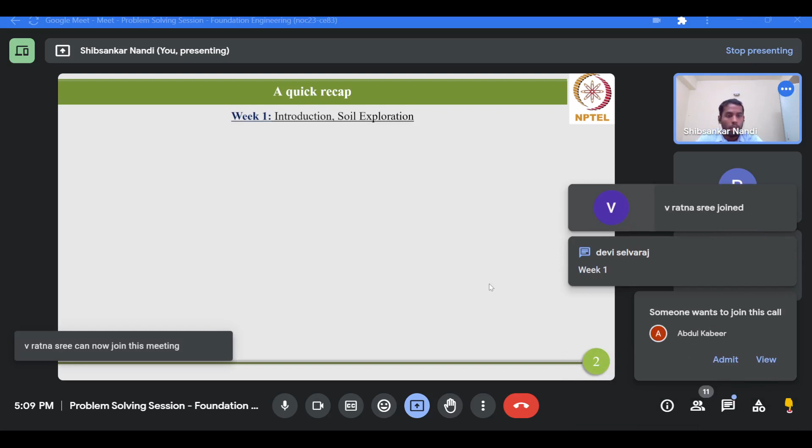I hope that you all might have gone through the weekly lectures. So far I think 5 lectures are released on the NPTEL portal. So have you gone through that? Sir, I am yet to go through. Okay, got registered, okay, that's fine, not a problem. Then I'll first briefly explain the topics as per my understanding, which I have learned from this specific week.

First of all, we have brushed up the concepts or basic fundamentals of soil mechanics. So what are those? Grain size distribution, weight volume relationship, relative density, Atterberg limits, hydraulic conductivity of soil, effective stress, compaction, consolidation, and shear strength. These are some basics of soil mechanics. Without the concept of these topics, we cannot proceed further.

This is an advanced level course, foundation engineering. So to solve the problems of this specific course, we need a very clear and in-depth understanding of these topics. We'll discuss more details about these topics while solving a few problems during today's session.

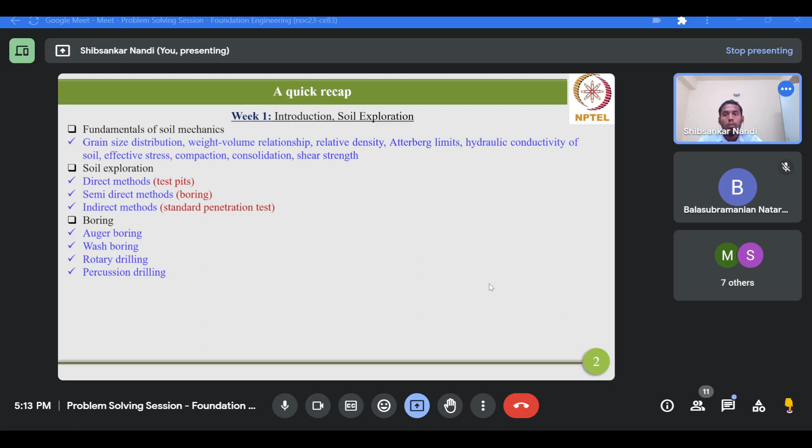Yeah, I think someone raised a hand. Ask what problem you were facing. What exactly are you trying to ask? Someone has raised a hand, feel free to ask, either use the chat box or unmute yourself. Sorry, I am not getting a response from your end. Okay, if it's fine from your end, then I can go further.

So boring can be classified into four groups, as mentioned earlier: auger boring, wash boring, rotary drilling, and percussion drilling. I assume all of you know the basic procedure by which boring is done, and for a particular boring method there are some limitations. It is not suitable for any kind of soil or any kind of engineering application, specifically in the context of geotechnical engineering. That you should know very clearly.

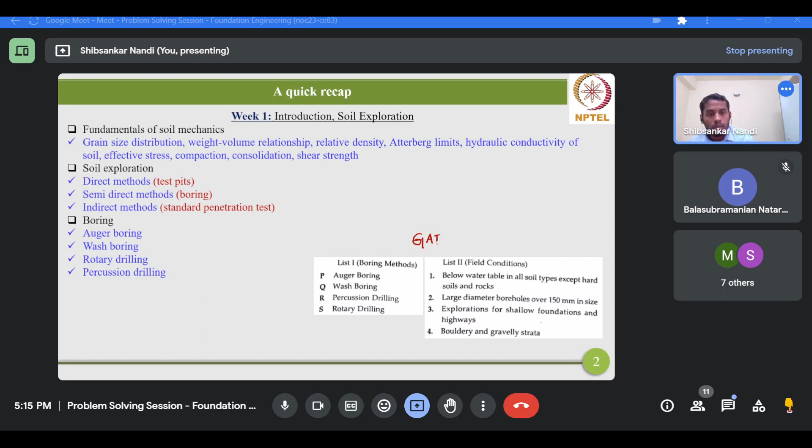For an example, I'll take a reference from GATE 2003. This data is taken from GATE. As you can see, there are two lists. The first is list 1 and the second is list 2. List 1 shows the boring methods like auger boring, wash boring, percussion drilling, and rotary drilling. List 2 shows the field conditions.

Now what we have to do is match the entities of list 1 with the entities of list 2, so that the boring method listed in list 1 is suitable for the field condition listed in list 2. This question is from GATE 2003. To solve similar questions, you should have knowledge of each boring method, its standard procedure, and its suitability for a particular type of soil or specific engineering application.

So can you please answer this question? Auger boring is for shallow foundation and highways. Yes, that matches with entity 3 in list 2. Very good. Auger boring is basically suitable for exploration for shallow foundations and highways.

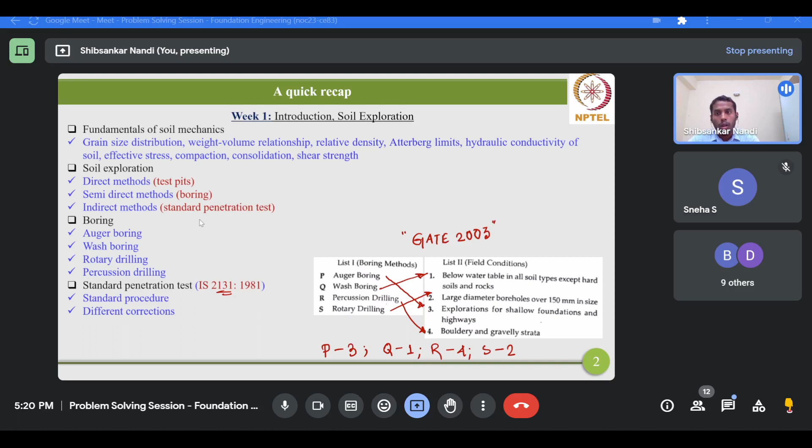So in this session we'll mostly solve a few numerical problems regarding the fundamentals of soil mechanics. Since we have learned very little about foundation engineering, except boring, different methods for soil exploration, and standard penetration test, we'll confine ourselves this week to solve a few numerical problems from the fundamentals of soil mechanics. Still, at the end of the session we'll try to solve two problems concerning the standard penetration test. Okay, let's start this session.

So problem one is related to the weight volume relationship. A sample of clay has the liquid limit and shrinkage limit of respectively 60% and 25%. If the sample has a volume of 10 ml at the liquid limit and a volume of 6.4 ml at the shrinkage limit, determine the specific gravity of the solids. Now we have to determine the specific gravity of the solids with the data given, like the volume of the soil sample corresponding to liquid limit and shrinkage limit respectively, where liquid limit and shrinkage limit values are 60% and 25% for the given soil sample.

So how can we solve this problem? Any idea? Okay, first let me ask: what is the definition of specific gravity of solids? If we denote the specific gravity of solids as Gs, what is the analytical expression for this Gs?

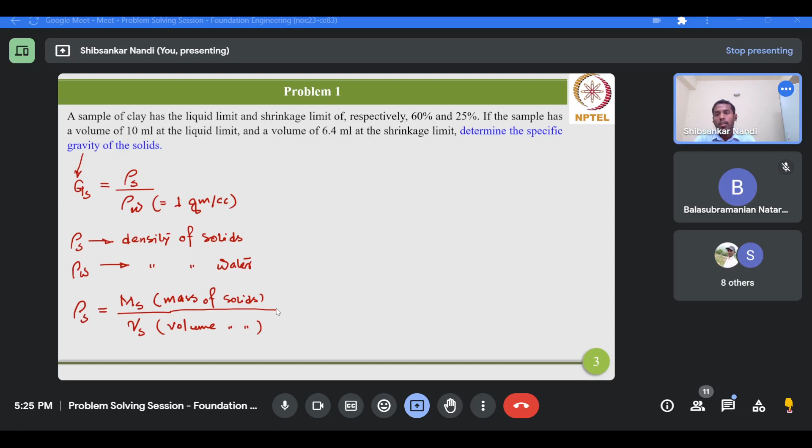So it is the ratio of mass of solids divided by volume of solids. So therefore we need to know the mass of the solids, which is basically involved in this given soil sample, and the corresponding volume of the solids. So if we know these, we can easily determine the specific gravity of the solids for this given soil sample. So for that, I am giving you some hint.

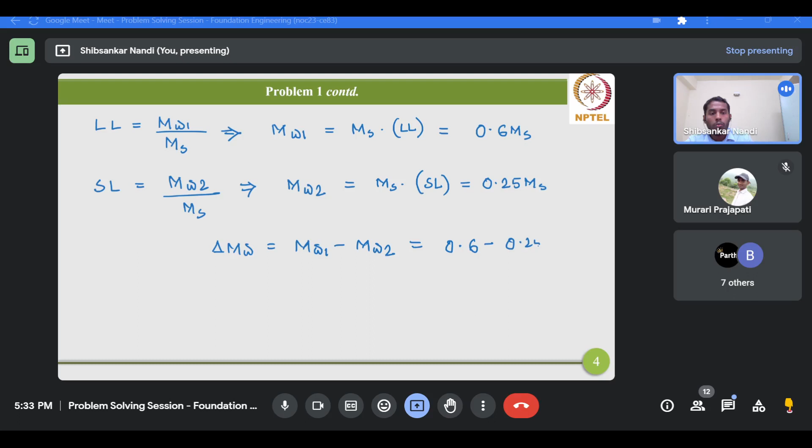Then delta MW would be MW1 minus MW2, that means 0.6 minus 0.25 times MS, that means 0.35 MS.

So we have determined this delta MW in two different ways. First, from the change in total volume of the sample: 10 minus 6.4, multiplied by the density of water - this gives the volume of water change, then multiplied by density gives the mass. Secondly, we determined it from the definition of water content.

Now these two should be equal - delta MW of 3.6 grams and delta MW of 0.35 MS. So 0.35 MS should be equal to 3.6 grams. From here we can easily determine the mass of solids as 3.6 divided by 0.35, that means 10.29.

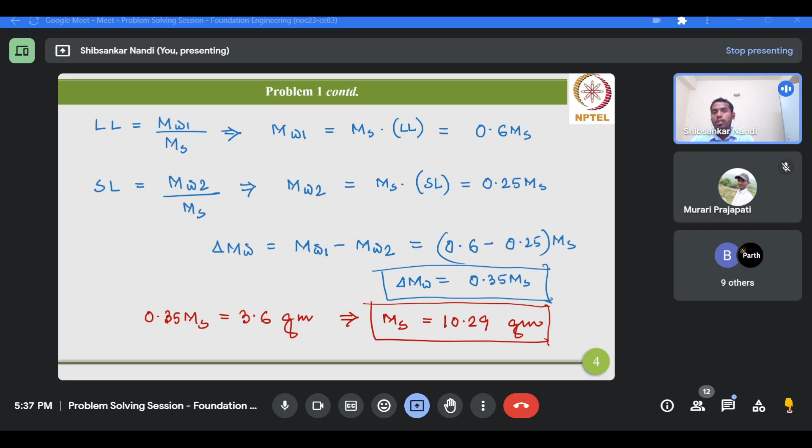How can we determine the volume of water? Because we know the mass of water for both conditions, liquid limit and shrinkage limit, from this expression: 0.6 times ms and 0.25 times ms respectively. Now we'll consider the liquid limit condition.

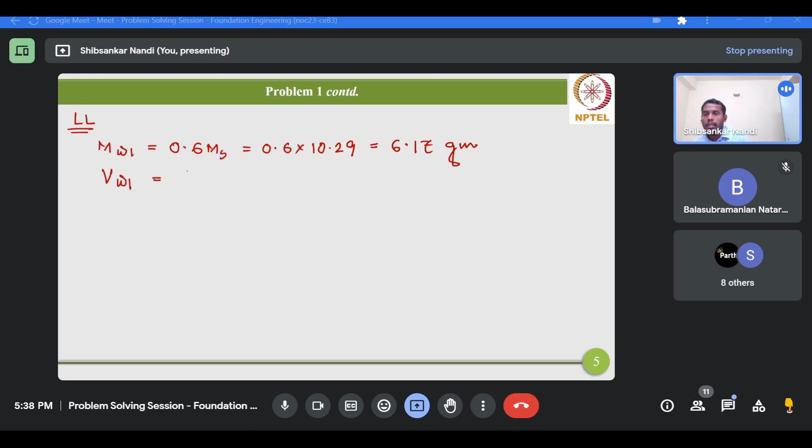So MW1 is 0.6 times ms, that means 0.6 multiplied by 10.29. What would be the value? It would be 6.17 grams. Since we know the mass of water, we can determine the volume of water by dividing by density: 6.17 divided by 1, that means 6.17 milliliters.

So the volume of solid would simply be V1 minus VW1. V1 is the total volume, so 10 minus 6.17, which gives 3.83 milliliters. Now it becomes very easy to calculate the density of solids, ms by vs.

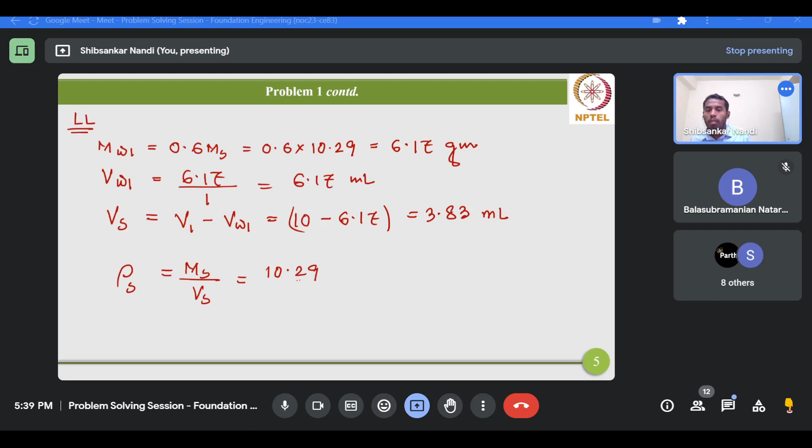So rho s equals ms by vs. ms we have got 10.29 and vs we have got 3.83. 10.29 divided by 3.83 gives 2.68, or 2.69 rounding up. Very good.

So GS, we can determine 2.69 divided by 1. So this would be the answer.

So this is the way by which we can determine the specific gravity of the given soil sample for the prescribed conditions. What are those conditions? The volume of the given soil sample concerning water content, which are liquid limit and shrinkage limit. By employing the basic three-phase relationship, we can easily address this kind of problem.

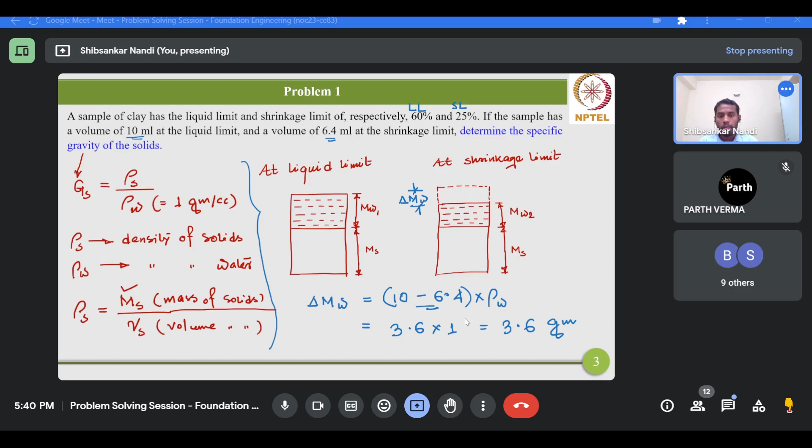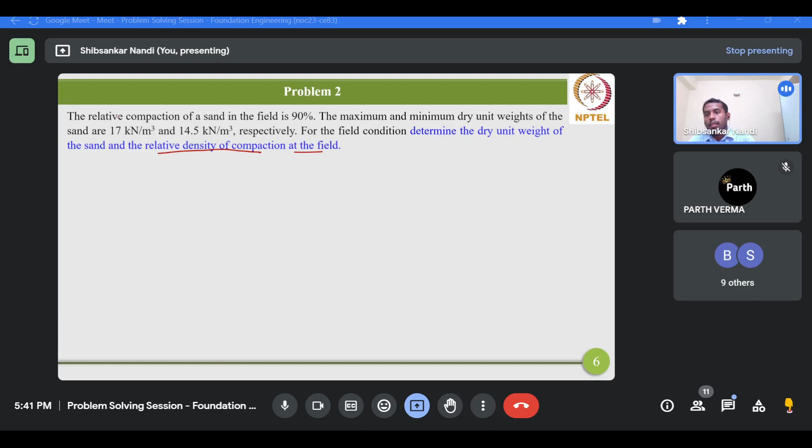As we can see from the problem statement, two terminologies are utilized here: the first is relative compaction and the second is relative density of compaction, or relative density. Now can you clarify for me, are these two terms the same? Do they signify the same physical entity, the same physical condition?

Yes, sir. How? Explain a little bit please. Sir, both tell about the denseness of sand, soil. You can go one by one. Okay, so first, define the term relative compaction. What is relative compaction?

What is relative compaction? What is compaction? It expels the air. Yes, so compaction is basically the process of densification of a soil through the expulsion of air. Okay, you are very correct.

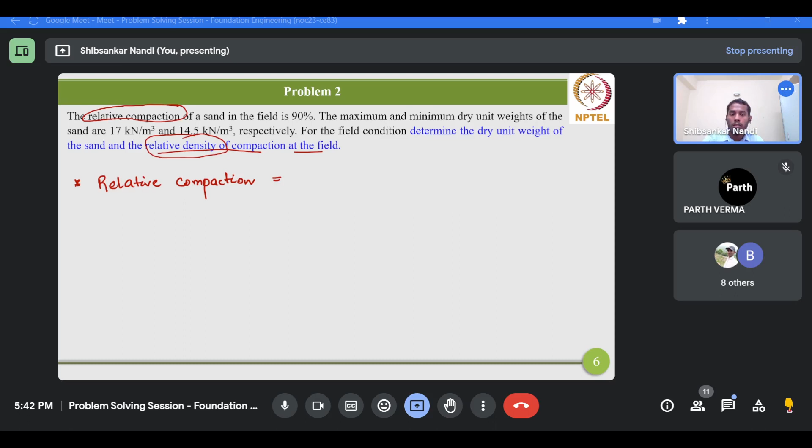Now then, what is relative compaction? It is nothing but the ratio of the dry unit weight achieved in the field divided by the maximum unit weight or density, whatever may be the case, obtained in the laboratory. So this is the ratio of field dry unit weight to the maximum dry unit weight. Is it correct?

Is it correct? Not getting that. Then what is the definition? Sir, not getting. Okay, you are not getting. Okay, so...

This is basically, suppose when you will be constructing some highways, dam or earthen embankment, so before that you need to compact the field. Yes or no? You need to compact, no?

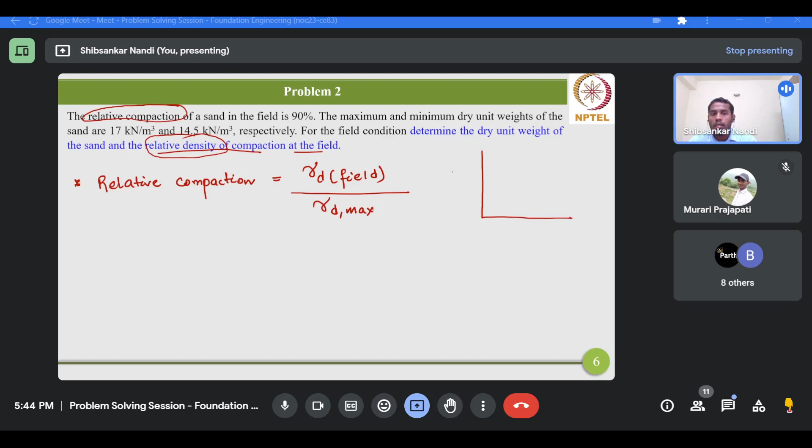So this kind of plot, this is the density and this is the water content. If you add water to the soil sample, it will go on increasing, but after some time, optimum moisture content - this water content is called optimum moisture content. So after attaining the maximum dry density or dry unit weight at the optimum moisture content, if we add further water to the sample, then the density or unit weight will go on decreasing.

Okay, so now from the laboratory you will be getting some maximum density for a particular moisture content. Now if you try to simulate the same condition in the field, will you be getting the same result? Whatever you are achieving in the laboratory, if you try to simulate the same condition in the field, will you be expecting the same result or not?

No sir, so you will never get the same result. Okay, so you will be basically ending up with different unit weight or density at the field. So that means there will be a difference, and this ratio - whatever you are getting or achieving in the field compared to what you have obtained from the laboratory investigation - that ratio will basically give you an idea of relative compaction.

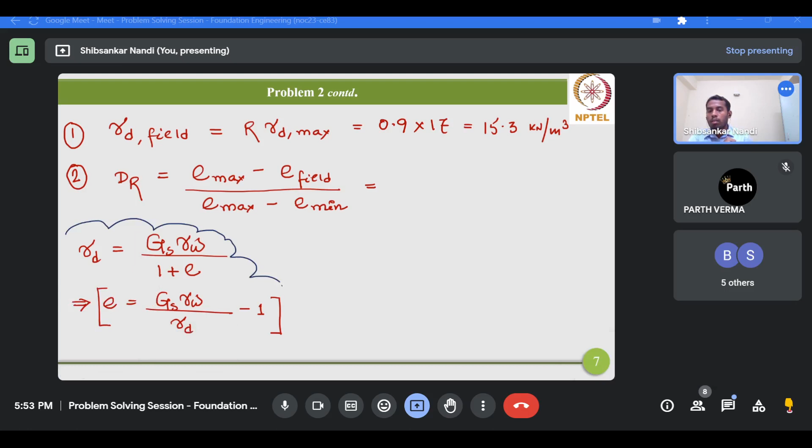So therefore, we can get the void ratio as Gs gamma W by gamma D minus 1. Do you agree with me? Yes, sir. Okay, so now we'll substitute this expression for void ratio into the relative density expression.

So E max, when will we be getting the maximum void ratio, for the maximum density or the minimum density? Now you have to be very careful when substituting this expression. The maximum void ratio, what condition will it correspond to, loosest or densest? Loosest, so that means the density will be minimum. So therefore, Gs gamma W by gamma D minimum minus 1.

And then again, Gs gamma W by gamma D field minus 1, plus 1. So minus 1 and plus 1 will cancel out, that's why I am not writing that component here. I am basically jumping one step, and then Gs gamma W by gamma D min minus Gs gamma W by gamma D max.

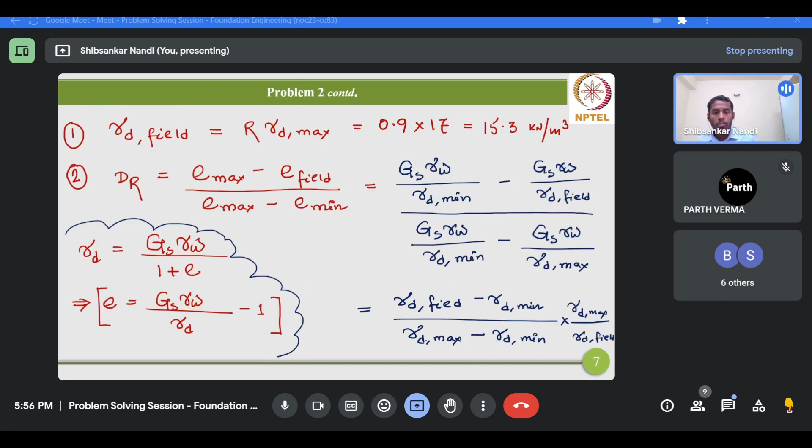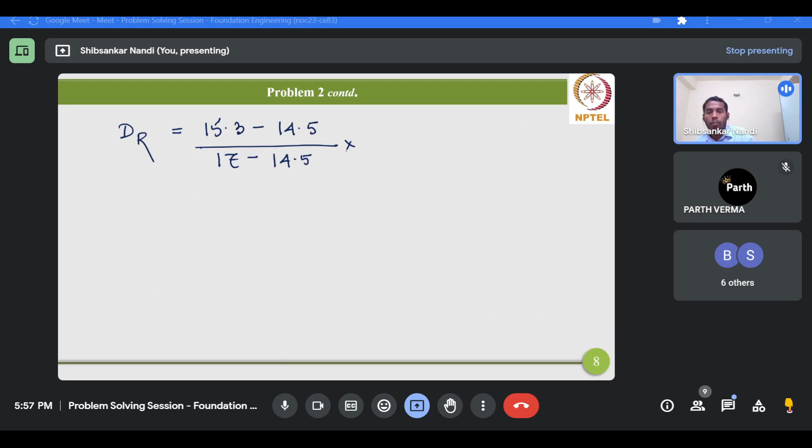Gamma D field we have already calculated as 15.3 kilonewton per meter cube. Gamma D min and gamma D max are directly given to us as 14.5 and 17 kilonewton per meter cube respectively. So the job now is to substitute the values in this expression. Dr, it would be gamma D field, that is 15.3, minus gamma D min, that is 14.5, divided by gamma D max, that is 17, minus gamma D min, that is 14.5, multiplied by gamma D max, that is 17, divided by gamma D field.

So can you please tell me the end result? 0.355. So that means 36%.

So now what does it indicate? 36% relative density. So the soil belongs to which kind of state: very loose, loose, medium dense, dense, or very dense? Medium.

Now if you know the range, if I can recall exactly: less than 15%, then 15 to 35, then 35 to 65, 65 to 85, and more than 85. So this is for very loose, loose, medium dense, dense, and very dense. Okay, so you are correct. So though it is on the borderline, meaning 15 to 35 and 35 to 65, so very close to the borderline.

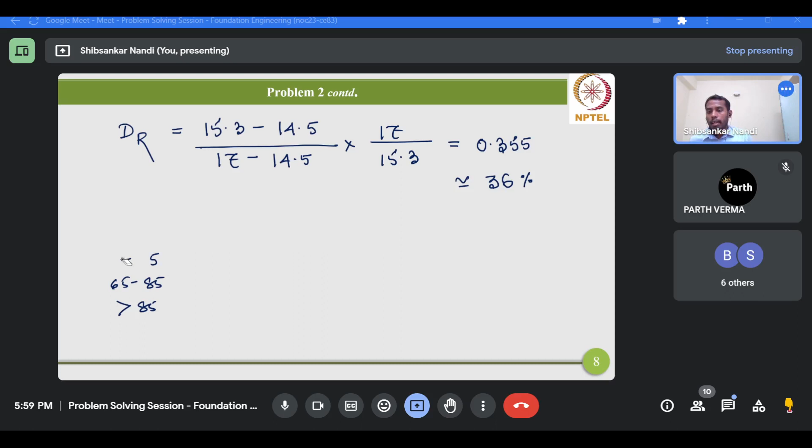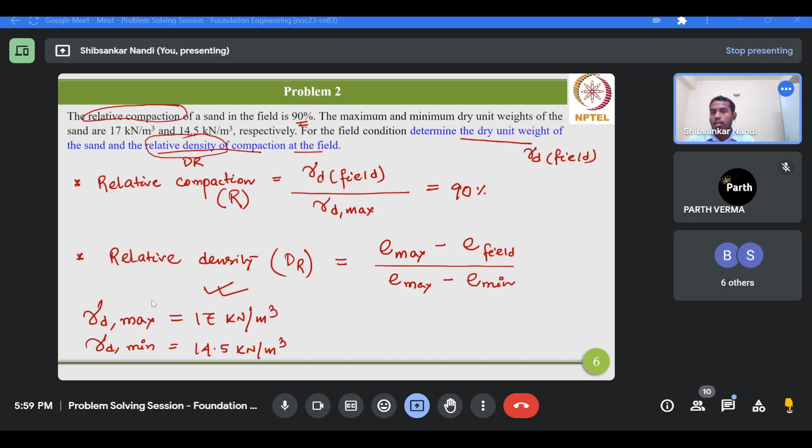Okay, so in this way you can understand the difference between these two terminologies, that is relative compaction and relative density. And it's very clear that both these terminologies are not the same. These two do not indicate the same physical condition or physical entity. Is it okay? Yes. Okay.

Now we'll take problem 3. So problem 3 is about the calculation of effective stress. Okay, so first we'll read the problem statement. The water table is at a depth of 5 meters in a silty soil mass of thickness 10 meters. Laboratory sieve analysis indicates an effective size of the soil mass as 0.015 millimeter.

If the void ratio of the soil mass is 0.67 and the specific gravity of soil solids is 2.67, and if the silty soil mass as described above is underlain by a clay layer of thickness 8 meters, what would be the effective stress at the middle of the clay layer? Assume the silty soil mass to be fully saturated in the capillary fringe zone, and above this zone saturated to a degree of 66%. Properties of the clay layer are given as water content 25%, specific gravity of soil solids 2.62, unit weight of water 10 kilonewton per meter cube. In addition to that, one constant is given as 45 mm square.

So first I will try to visualize the problem, the stratified soil deposit, the in situ soil deposit. So first of all, there is a silty soil mass of thickness 10 meters.

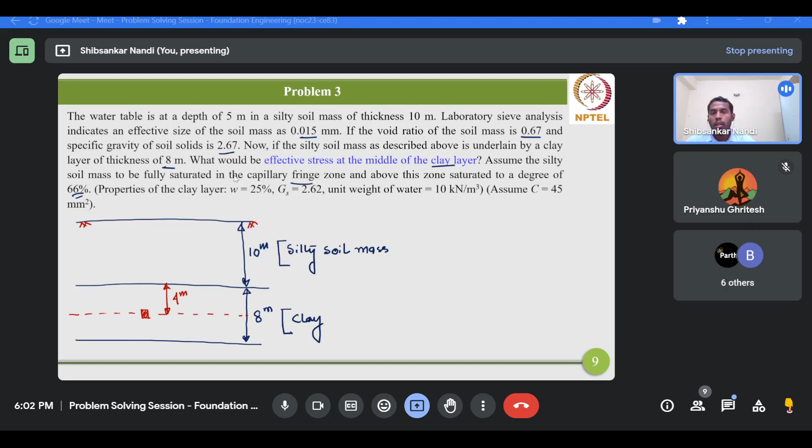Now, what is the location of the water table? It's 5 meters. So this is the groundwater table, at a depth of 5 meters from the ground surface, and this is the ground surface.

So this kind of stratified deposit we have. First 10 meters is silty soil mass, inside which we have encountered the groundwater table at a depth of 5 meters, and the thickness of the silty soil mass is 10 meters. Then it's underlain by clay of thickness 8 meters, and we have to calculate the effective stress at the middle of this clay layer, that is at a total depth of 14 meters from the ground surface. Now, what are the conditions given to this problem?

So the conditions are like that: the properties of the silty soil mass. Laboratory sieve analysis indicates an effective size of the soil mass. What is the effective size? What do you mean by effective size? It is nothing but the diameter corresponding to 10% percentage finer, D10.

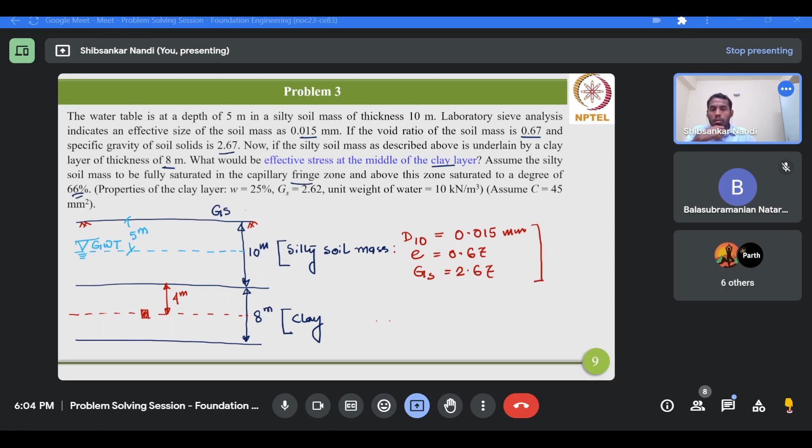Now coming to the clay, the properties given are water content 25% and Gs 2.62. And apart from the properties of the silty soil mass and clay, additional data: C equals 45 mm square, and unit weight of water we can take as 10 kilonewton per meter cube. So we'll see why this information is given, it's the additional information, the constant value of 45 mm².

So can you please guess why this information is given to this problem, or what are the basic steps needed to calculate the effective stress at the mid depth of the clay layer? Height and unit weight. Okay, very good. So unit weight is not directly given to us, so we can get it using the simple weight-volume relationship. Yes or no? Yes, okay.

And then one statement is mentioned here: assume the silty soil mass to be fully saturated in the capillary fringe zone. Now what is capillary fringe zone? Can you please recall the concepts of capillarity?

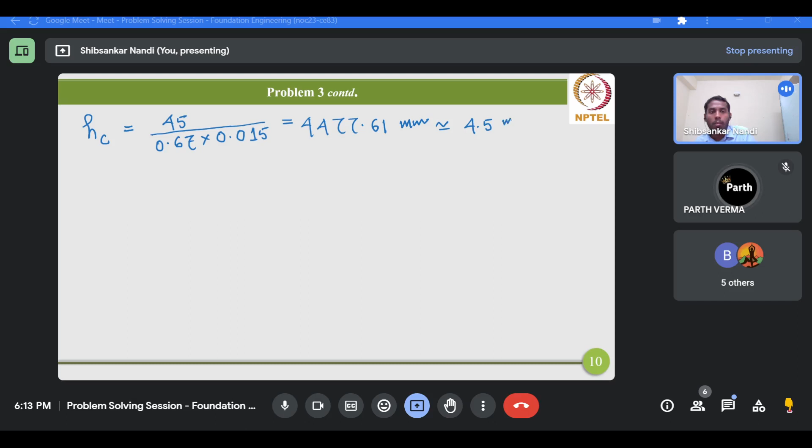4477.61 millimeter. So that means we can approximate this value as 4.5. So this height now equals 4.5 meter. That means only the remaining 0.5 meter, because this is also 5 meter, so 5 plus 4.5, that means 9.5.

So the remaining depth is 0.5, because the total thickness of the silty soil is almost 10 meter. So out of 10, 9.5 meter is completely saturated. So the partially saturated zone, to a degree of 66%, is only of thickness 0.5 meter. Now we'll go for calculating the unit weights.

First, for the 0.5 meter, we need to calculate the bulk unit weight, since this portion is partially saturated. For the remaining 9.5 meter, we will calculate the saturated unit weight for the silty soil mass and clay separately.

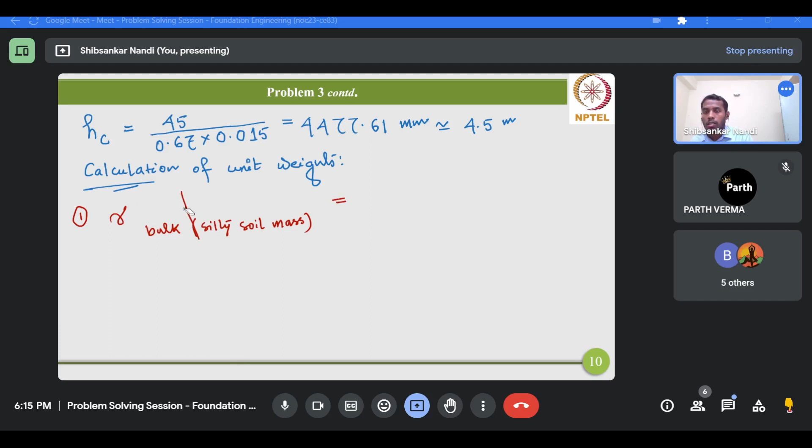Calculation of unit weight. First of all, we'll calculate gamma bulk for the silty soil mass. How can we calculate the bulk unit weight? It is given by GS plus Se divided by 1 plus e, multiplied by gamma W. All these parameters are known: GS is 2.67, S value is 66%, void ratio is 0.67.

So we'll substitute these values one by one: 2.67 plus 0.66 multiplied by 0.67, divided by 1 plus 0.67, and gamma W is 10 kilo. How much value are you getting after calculation? Sir, please show the previous slide.

Sir, here you have written GS as 2.62 and there 2.67. No, please note very carefully that the specific gravity of the silty soil mass is 2.67, and the specific gravity of the clay is 2.62. Two different values are given in this problem.

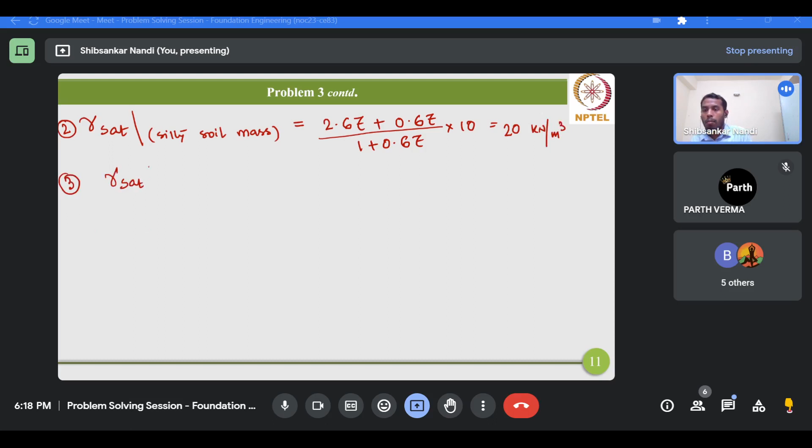And finally, gamma sat for clay: 2.62 plus... here the void ratio is not directly given; rather, the water content and GS values are given, so we can calculate the void ratio from the basic relationship Se equals WGS. It would be 1 for full saturation, so that means 0.25 multiplied by 2.62, which gives 0.66. Please check.

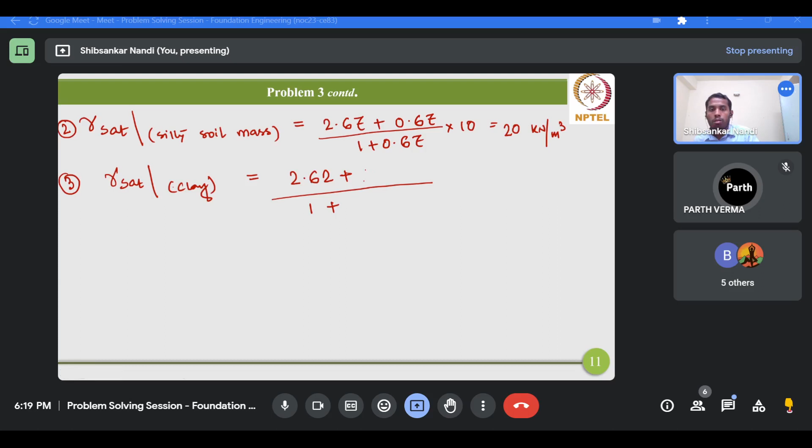Now all the unit weights required to calculate the effective stress at the mid depth of the clay layer are with us. We have to be careful about the right substitution. First we'll calculate the total stress; suppose this is point A. So sigma A would be the summation of the multiplication of the unit weight and the respective height. First we'll start from the partial saturation zone.

So that means gamma bulk of the silty soil, that is 18.63, multiplied by 0.5. Then the gamma saturated of the silty soil mass multiplied by 9.5. Then gamma sat of the clay multiplied by the respective height. This will give you the total stress at point A.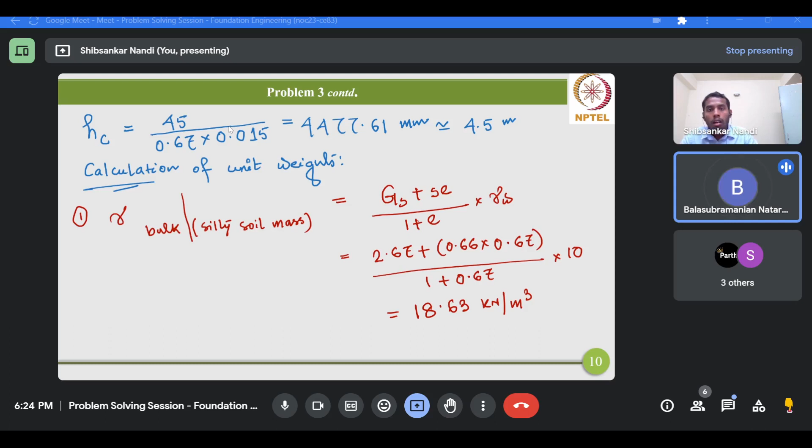Sir, one small doubt, kindly - sir, how is this useful in field? Just now you told me, I could not get it. Kindly repeat it, sir, this whatever calculation we made. This is the stress at the underlying layer, that is what we have calculated. Okay sir, in what way is this useful in field?

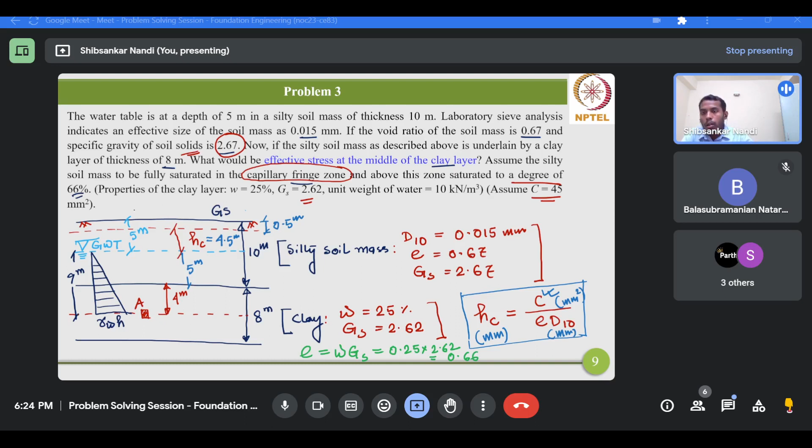Kindly explain this - so basically, this effective stress, whatever we have got at the mid depth of this clay layer. Now suppose you are constructing some foundation or footing over this ground surface, or at some depth below the ground surface. So already there was some in situ stress, and you are applying more stress through the construction of this foundation. This foundation is basically transferring the load of the superstructure to the soil mass below.

So when you will design this footing, though this is not part of today's session, I am still briefly explaining. When designing this foundation - its geometry, the length and breadth, width, or the depth of foundation - in a generalized scenario or broader perspective, you have to fulfill two aspects.

The first aspect is that the foundation should not fail in shear. The next is that the settlement of the foundation should be under the permissible limit. Some permissible limits you will get from the Indian standards when you follow the recommendations already prescribed there. So this foundation needs to satisfy two conditions: shear failure criteria and the permissible limit criteria.

Now, when calculating this settlement, it will have different components: immediate settlement, consolidation settlement, secondary settlement, and so on. For the calculation of immediate and consolidation settlement, and I hope even in the case of secondary settlement, you need to know the effective stress at the mid depth of that layer.

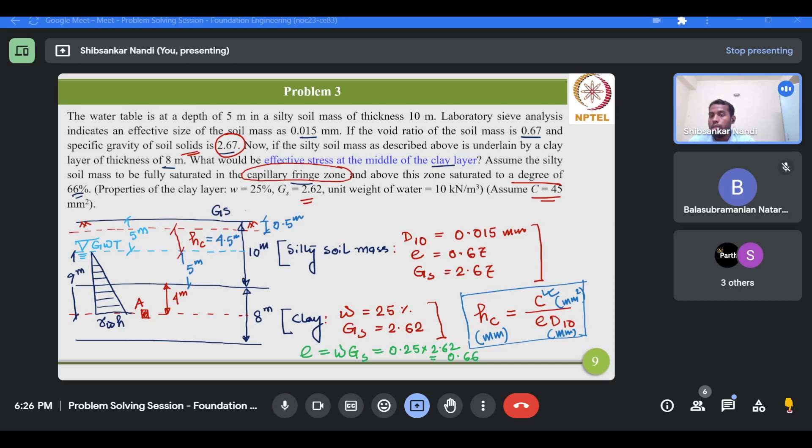Means the layers - and obviously this foundation will be having some influence zone, so it will not basically influence the entire thickness below the foundation. Suppose this is the foundation I am talking about, situated at a depth of Df from the ground surface. These are the stratified deposits, so this foundation will have a particular influence zone, something like that.

So these are the layers which we should consider for the calculation of bearing capacity and the settlement, not the entire layer. Why? That we'll know from the subsequent lectures.

Now, as you know, for the calculation of consolidation settlement, suppose these two layers basically come into the picture. This layer is basically sand and this layer is clay. So only this clay layer will basically constitute the consolidation settlement.

Now, at the mid depth of this layer, you need to calculate the effective stress. So if you don't know how to calculate the effective stress, then how can you compute the settlement of this layer? Is it possible for you to calculate the settlement of this layer?

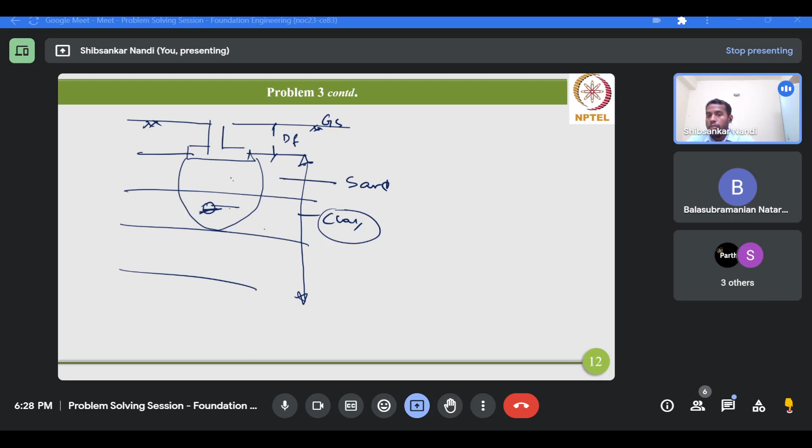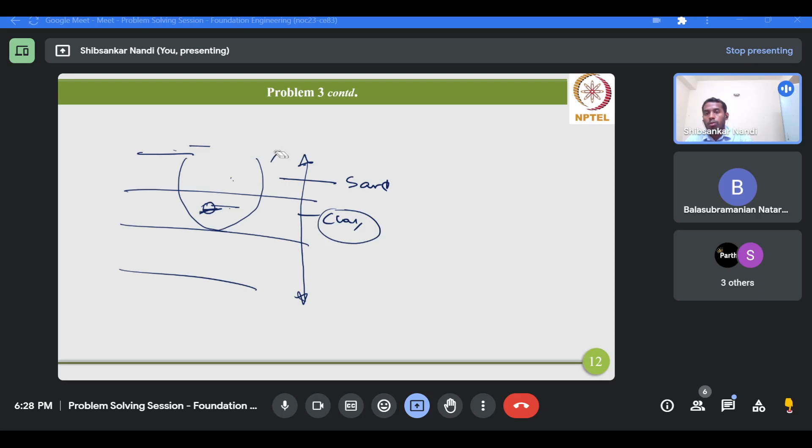Are you getting my point or not? Yes, sir. Okay, so in that way, the calculation of effective stress is very essential for designing a footing. It will indirectly affect the design process, and it will be very clear from this immediate problem which we are going to solve.

At least for the settlement calculation part, since we are not dealing with the design at this moment, since it's unfamiliar to us.

So the soil profile at a site for a proposed office building, as shown in figure 1, consists of a layer of fine sand 10.4 meters thick above a layer of soft normally consolidated clay 2 meters thick. So this is the stratified deposit talked about in this problem.

So the first layer is fine sand, then clay, and below the soft clay is a deposit of coarse sand. So 3 soil types are mentioned in this problem.

The groundwater table was observed at 3 meters below the ground level. So this is the location of the groundwater table from the ground surface.

The void ratio of the sand is 0.66 and the water content of the clay is 34%. So these are the properties of the clay only.

Please note: the building will impose a vertical stress increase of 160 kPa at the middle of the clay layer. So this is the additional stress increase you get due to the construction of the proposed office building on this site. Suppose here the office building is constructed, and this data is given to you: that it will basically impose a vertical stress increase of 160 kPa.

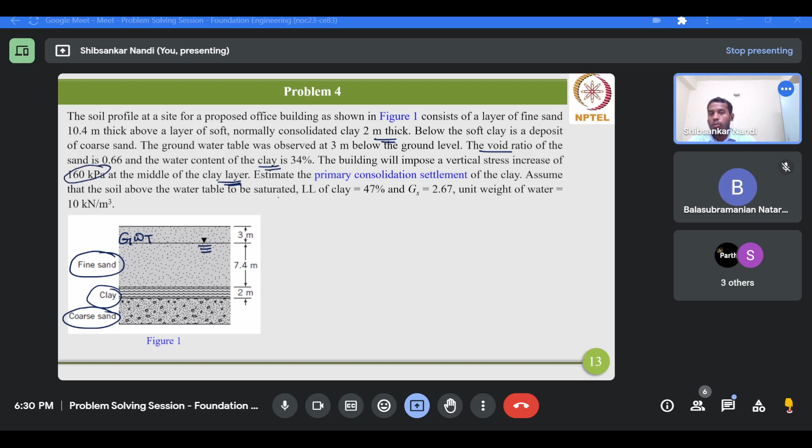Estimate the primary consolidation settlement of the clay. Assume that the soil above the water table is saturated. Liquid limit of the clay is 47%, Gs is 2.67, and unit weight of water as usual, 10 kN per meter cube.

Now we need to calculate only the consolidation component. Now how can we calculate this primary consolidation part?

How can we calculate the consolidation settlement of this clay layer of thickness 2 meters?

So for calculation of the consolidation settlement, we can take the help of this expression: Cc by 1 plus E0, H log of sigma 0 prime plus delta sigma divided by sigma 0 prime.

If you cannot recall this expression or the fundamentals of consolidation, please go through the concepts once again, as it will be used again and again in the rest of this course. Effective stress, consolidation, shear strength - these concepts are very much useful for comprehending this course.

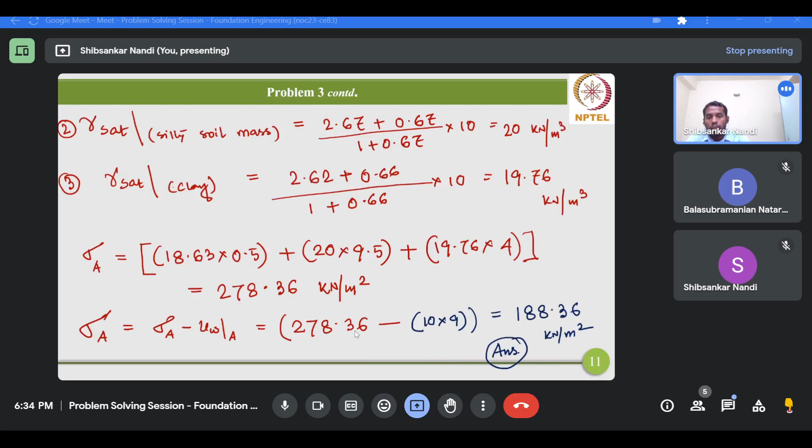What's the value for E0? We can follow the same methodology as we followed in problem 3. So we can calculate this E0 from the expression WGS.

So W here is given as... what is the water content of the clay? This is 34%, or 0.34. And what is the value of specific gravity of the clay? This is 2.67.

That means the initial void ratio of the clay sample is 0.91.

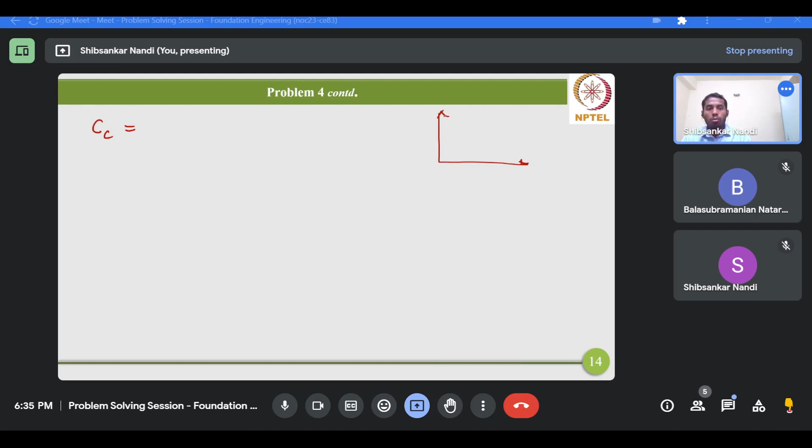What about the compression index? For that, either we can determine this compression index from the slope of the pressure-void ratio plot. If you go through the consolidation chapter, you'll get this kind of plot, E versus log of sigma prime. The slope of this plot will basically give you the compression index.

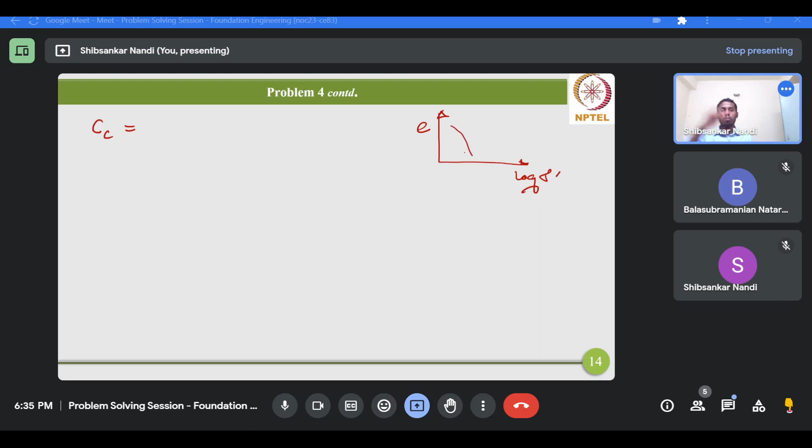Now this kind of data is not available with us, so we can determine the CC value from one of the empirical equations available in the literature. I'll write one such equation: 0.009 multiplied by LL minus 10, where LL is the liquid limit of the clay, mentioned as 47%. So 47 minus 10 - what would be the value?

So we know the CC, initial void ratio, thickness, and delta sigma. The only component we have to figure out is the initial effective overburden pressure at the mid depth of the clay layer. For that, we have to calculate the unit weights starting from the ground surface up to this point, as we have done in the previous problem.

From now on, this problem will basically be repetitive in nature, so I'll quickly go through it without spending much time. First we'll start with the sand. For sand, we have to calculate two unit weights - first, for the sand above the water table, we have to calculate the bulk unit weight.

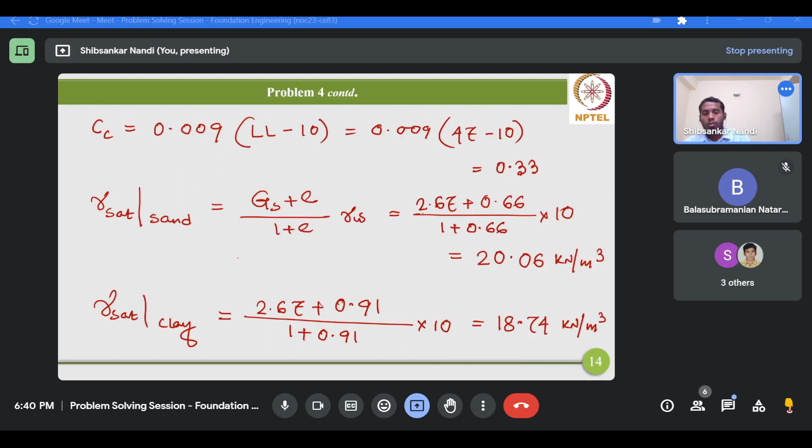Okay, so now we'll calculate the effective vertical stress at the mid of the clay layer - we can denote this sigma 0 prime. We are directly determining this value, so it would be 3 plus 7.4, so 10.4, multiplied by the saturated unit weight of the sand, that is 20.06.

So 20.06 multiplied by 10.4, plus 18.74 - that's the saturated unit weight of the clay - multiplied by 1, because we need to calculate the effective vertical stress up to the mid depth of the clay. So that means 3 plus 7.4 plus 1.

Then we have to deduct the pore water pressure. Similarly, the pore water pressure would be 7.4 plus 1, so 8.4. So gamma W into 8.4, 10 into... please quickly calculate and let me know the value. I think it would be 143.36. Is this correct?

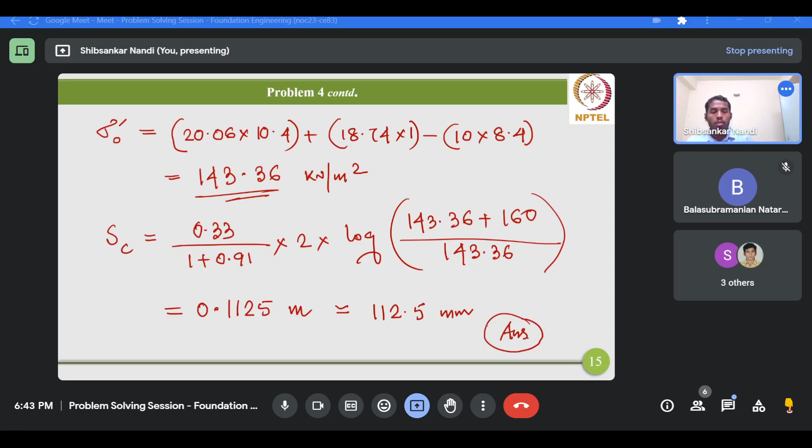How much are you getting? So I am getting 0.1125 meter, that means 112.5 millimeters. So this much consolidation settlement will happen for this clay layer for an additional vertical stress increase of 160 kPa at the middle of the clay.

So someone is having a doubt about how this effective stress calculation is required for this course - this is an example for that.

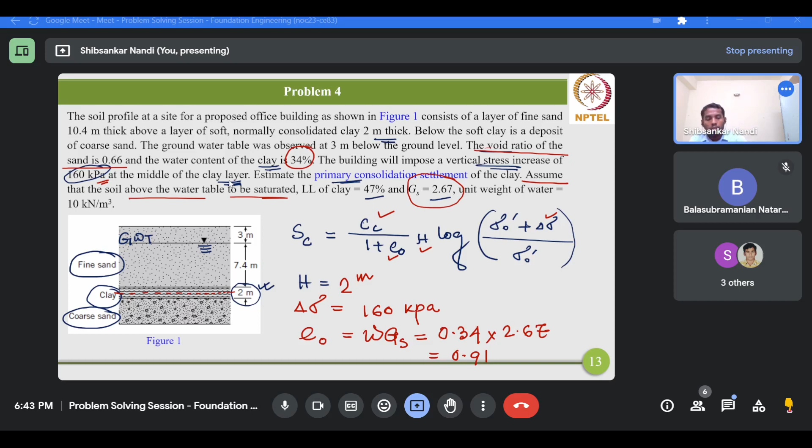A consolidated drained triaxial test was carried out on a sand sample with known effective shear strength parameters: c prime is 0 and phi prime is 30 degrees. Prior to failure, while the sample was undergoing axial compression under constant cell pressure, the drainage valve was accidentally closed. At failure, 360 kPa deviatoric stress was recorded along with 70 kPa pore water pressure. If the test is repeated without such error and no back pressure is applied in either test, what is the deviatoric stress in kPa at failure?

Please understand the problem statement very carefully. We were trying to conduct a consolidated drained triaxial test. As you know, there are three kinds of triaxial tests: consolidated drained, consolidated undrained, and unconsolidated undrained.

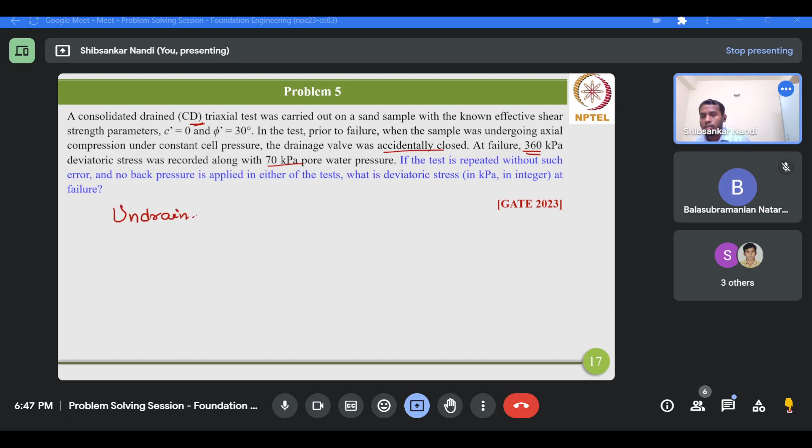What is being referred here? Two conditions are mentioned in this problem: the first one is undrained, due to accidental closure of the valve, and then drained, which was actually to be performed. For the undrained condition, what parameters are recorded? The deviatoric stress sigma d is recorded as 360 kPa, and the pore water pressure u is 70 kPa.

Now for the drained condition, what do you need to calculate? You need to calculate it using the drained shear strength parameters known to you: the effective cohesion is 0 and the effective angle of internal friction is 30 degrees, since this is a sand sample. How can we determine this?

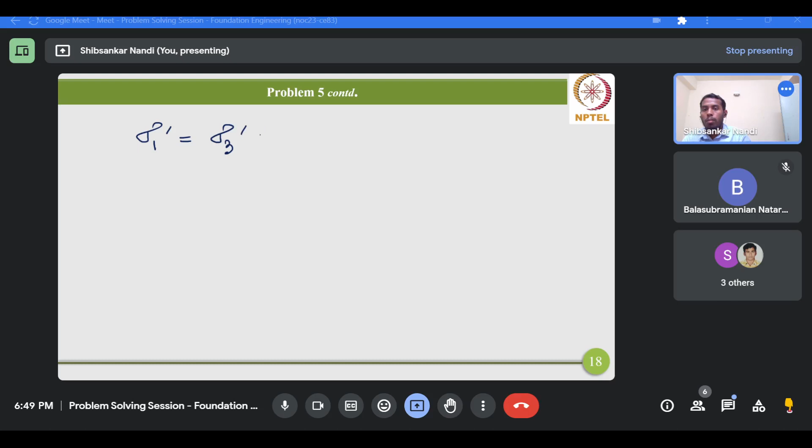We can determine it from the relationship: sigma 1 prime equals sigma 3 prime times tan squared of (45 degrees plus phi prime by 2) plus 2c prime tan(45 degree plus phi prime by 2). This relationship is derived from the Mohr-Coulomb failure criterion in the principal stress plot, sigma 1 prime versus sigma 3 prime, where prime denotes the effective stress condition, which is total stress minus pore water pressure.

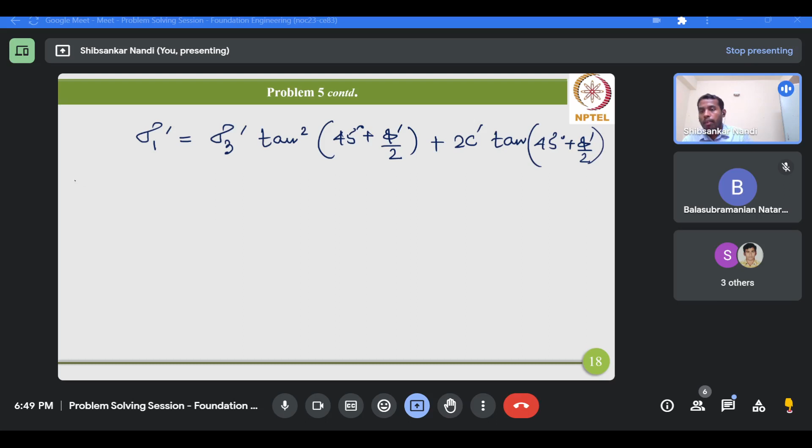Now for the undrained condition: what would sigma 1 prime, the effective major principal stress, be? It would be the total stress minus the pore water pressure, yes. Before going further, one point to mention: for this problem we can ignore the second part completely, since the effective cohesion is 0.

So that cohesion term will vanish, and we only have to deal with the first part. Now coming to sigma 1 prime, it's sigma 1 minus u. And you know the definition of the deviatoric stress — what is the definition of deviatoric stress?

So the definition of deviatoric stress is nothing but the difference between the major principal stress and the minor principal stress. You should know this concept.

When performing the triaxial test, the first part is consolidation or unconsolidation, then the second phase is shearing. During shearing, the confining pressure remains constant, and you apply additional stress in the vertical or axial direction. That represents the major principal stress. So sigma 1 minus sigma 3 will give you the deviatoric stress.

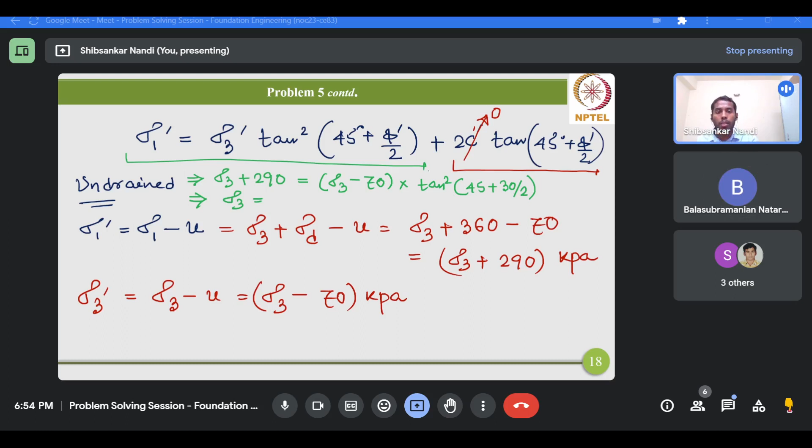So tan square of 45 plus 15, that means tan square 60, so it will be 3. This entire part will be 3. So sigma 3 plus 290 equals 3 times sigma 3 minus 210.

That means 3 sigma 3 minus sigma 3, so 2 sigma 3 would be 290 plus 210, that means 500. So sigma 3 equals 250. Yes or no? Are you getting this value? 250 kPa for sigma 3.

Yes sir, I'm getting it. So the confining pressure used to perform the triaxial test was sigma 3, and it should be valid for both scenarios, drained or undrained. So the problem was in the drainage valve.

For that drainage valve only, the initially planned drained test becomes undrained. So sigma 3 value was 250 kPa.

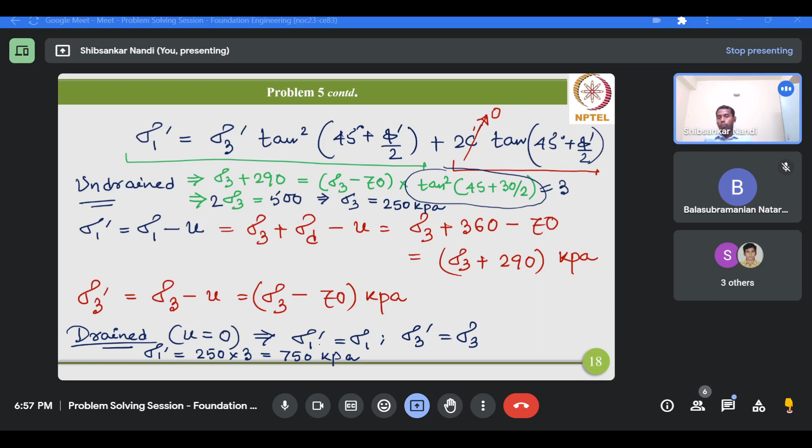So we can easily determine the major principal stress for the drained condition. Sigma 1 prime would be 250 multiplied by tan square of 45 degrees plus phi prime by 2, and the value of this part is 3. That means 750. So the effective major principal stress at failure for the drained condition is 750 kPa.

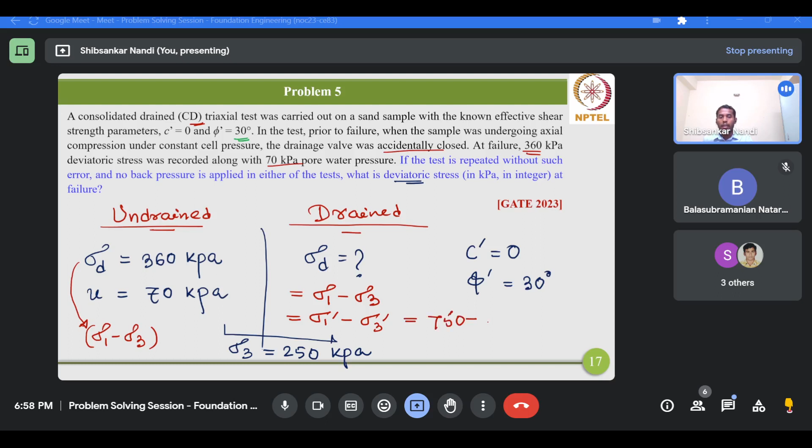Now what do we have to report? We have to report the deviatoric stress, which again is the difference between sigma 1 minus sigma 3, and that implies sigma 1 prime minus sigma 3 prime, because if you subtract U from both components it cancels out. So that means 750 minus 250, which gives us the deviatoric stress at failure for the drained condition. As I mentioned earlier, this question is taken from GATE examination 2023.

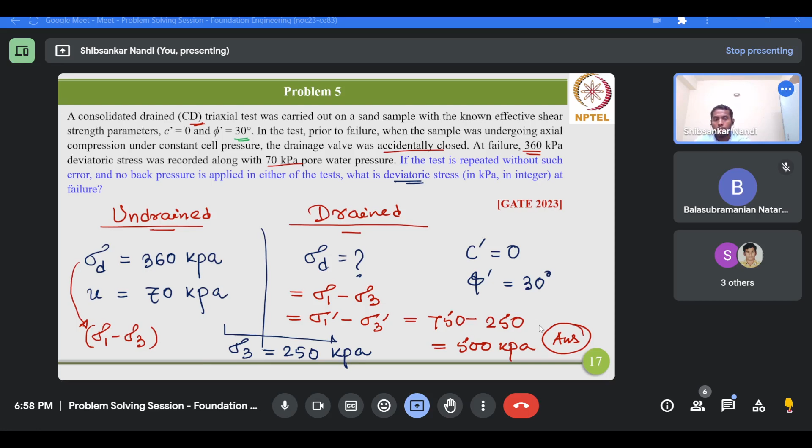Now this is the last problem for this session, and it's a straightforward problem related to the standard penetration test. In a soil investigation work at a site, standard penetration test was conducted at every 1.5 meter interval up to 30 meter depth. At 3 meter depth, the observed number of hammer blows for 3 successive 150 mm penetrations were 8, 6, 9 respectively.

So what do we have to report? The SPT N value at 3 meter depth. Again, this problem is taken from GATE examination 2020. Now what would be your answer to this problem? What is the definition of SPT N value?

What is the definition of SPT n value? It is the summation of the number of blows required.

It is required for the last two successive penetrations. So if this is 150, this is 150 - first 150, second 150, third 150 - then the number of blows required to penetrate the last two 150mm, that is total 300mm, that will be the SPT n value. And why is the first one, the number of blows required for 150mm, discarded?

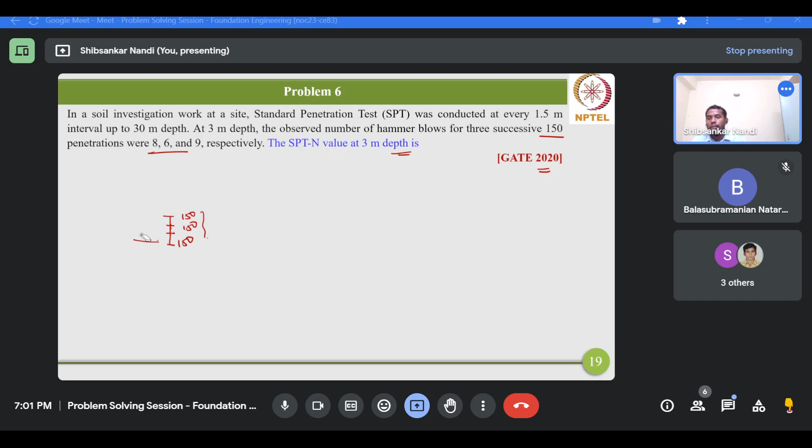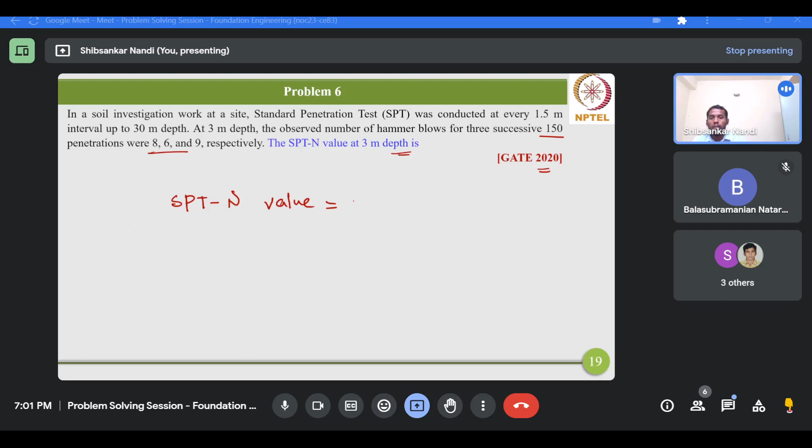And the last two 150mm penetrations, total 300, are added and recorded as the SPT n value, field SPT n value. So that means the SPT n value for this problem would be 6 plus 9. Is it okay? Yes sir, correct.

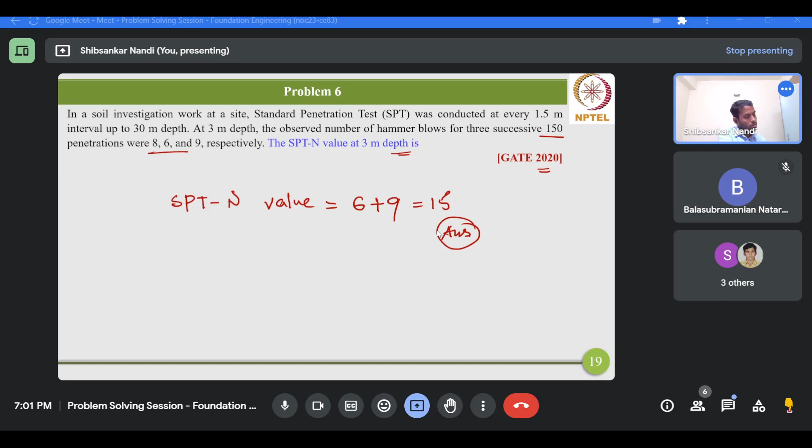Okay, so now we'll end this session by taking one homework problem. This homework problem is about a standard penetration test again, carried out at a location using a manually operated hammer dropping system with 50% efficiency.

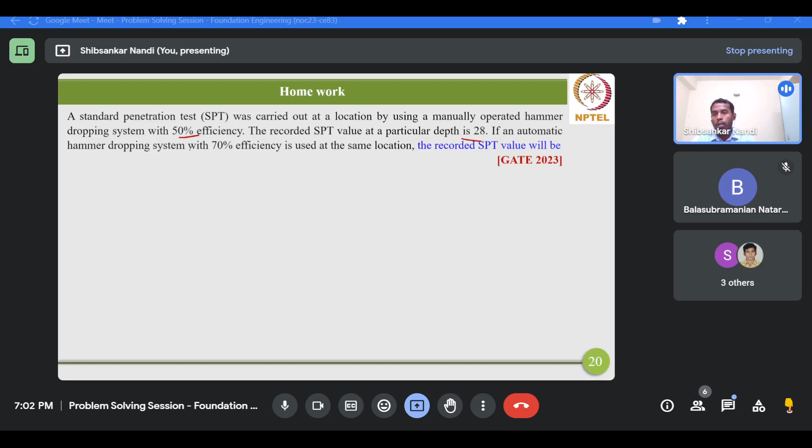The recorded SPT value at a particular depth is 28. If an automatic hammer dropping system with 70% efficiency is used at the same location, what would be the recorded SPT value? As you can see, this question was asked in GATE examination 2023.

Two conditions are mentioned in this problem. First scenario: a manually operated hammer dropping system with 50% efficiency is used, and the recorded SPT value at a particular depth is 28. In the second scenario, an automated hammer dropping system with 70% efficiency is used. Now we have to report the recorded SPT value. What should it be?

So any idea? No idea, sir. No idea. Okay.

For that you need to know that the field SPT n value is preferably expressed in terms of efficiency. Efficiency in the sense, if you go through the lecture, you will get the input energy, whatever is basically applied or imparted to the system, because of how the SPT test is performed.

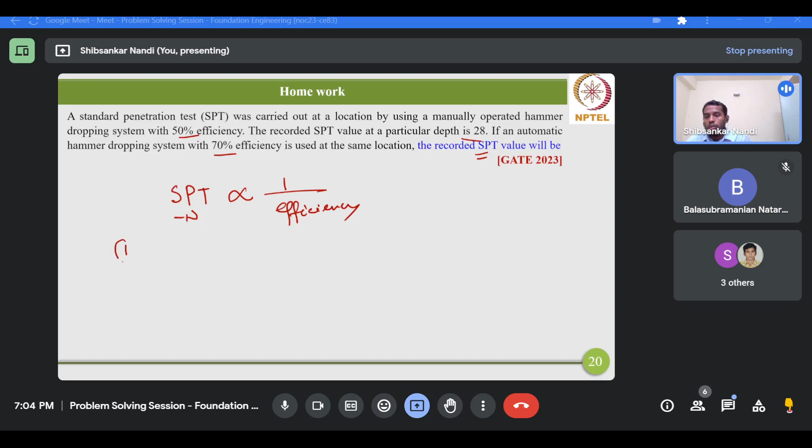Now, if we consider situation 1 and situation 2, for the first one it is eta1 equals 50%, and N1 is 28, and for the second scenario it is 70%. Now what will be N2? From this relationship, eta1 times N1 equals eta2 times N2. If we solve, you can easily determine the answer.

Okay, eta represents the efficiency and N represents the SPT n value.